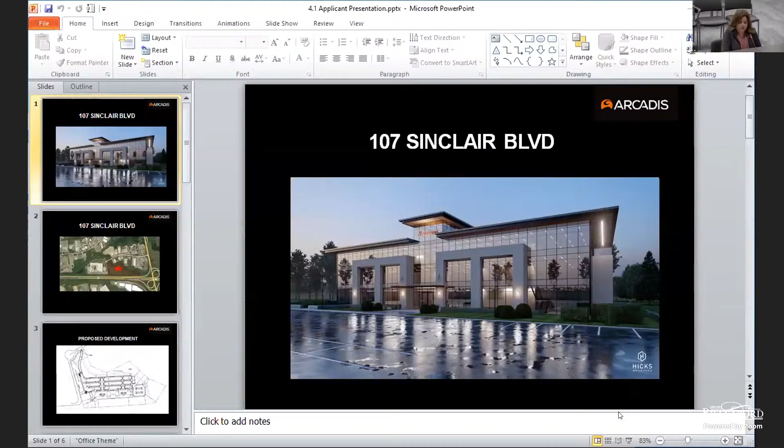Good morning. Good morning, that working? Great, good morning. My name is Odette Gomes of Arcadis Group. I'm representing the applicant this morning. So I am here in support of staff's report and their recommendation for approval.

Next slide, please. So the property currently includes 115 Sinclair and 107 Sinclair, so it's one property that has 2 municipal addresses. The subject of this application, though, is just for the piece on 107 Sinclair, which is the piece on the right-hand side there of the slide with the star on it. The piece at 115 Sinclair currently has an industrial bakery on it, and 107 Sinclair is currently vacant. The 107 Sinclair piece consists of approximately 5.72 hectares in size. The lands are located south of Sinclair Boulevard and north of Highway 403.

Next slide, please. So the proposed development includes the construction of 2 3-story office buildings, each having a gross floor area of approximately 5,580 square meters. 428 parking spaces are proposed, 16 of which are accessible spaces, and access is proposed from Sinclair Boulevard.

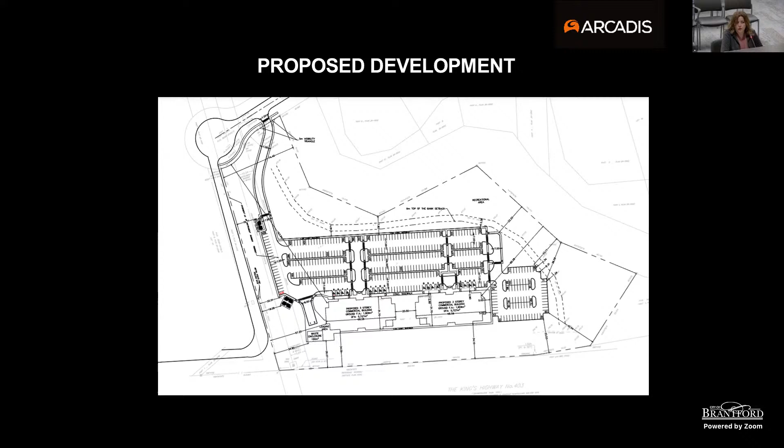So the applicant for this site is an existing established business, and they specialize in transportation, distribution, and logistics. They're seeking to expand and relocate a portion of their business to Brantford. They're looking to include a new head office here in Brantford, and this is the ideal site for them right now. This proposed development will help support their future needs. So all the required studies and reports have been prepared for this submission, and they all support the proposed development.

So in order to facilitate the proposed development, an official plan amendment is required to change a portion of the lands to prestige employment, permitting the 3-story buildings we're proposing, as well as maintaining some of the core natural areas. A zoning bylaw amendment is also required, and we're asking for a change in zoning from general industrial zone M2 to holding business park industrial exception 12 zone.

The proposed development is designed to avoid the western portion of the subject lands and the adjacent Fairchild Creek stream. To safeguard the preservation of natural features, a buffer area has been provided and confirmed by a slope stability study. These lands will remain protected. An environmental impact assessment was also conducted, confirming that the proposed development will not create negative impacts on the natural heritage features.

The redesignation of the subject lands to a prestige employment area will allow the City of Brantford to contribute to the provincial objective of municipalities designating and preserving lands within settlement areas located adjacent to or near major goods movement facilities and corridors, including major highway interchanges, as areas for manufacturing, warehouse, and logistics. The subject lands have been identified as part of an existing employment area, which contributes to the overall economic output of the municipality and province.

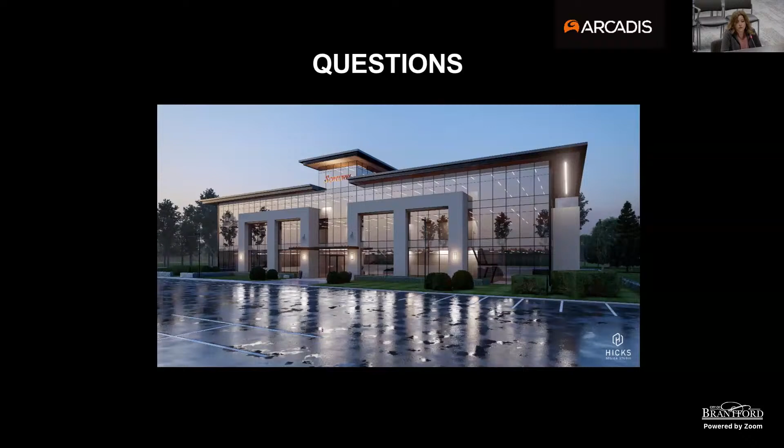As the City of Brantford grows in population, spaces that contribute to economic viability and long-term success are important. The proposed office buildings on these lands recognize this need and directly contribute to supporting job growth along with population growth. It is my opinion that the proposed development represents good planning, and we ask that you support our request this morning. I'm happy to answer any questions and provide clarification.

So members, anybody have any questions? We'll start with Councillor Sluss.

Thank you, Mr. Mayor, and welcome, Odette. The picture, the rendering that you're showing, is that of one building, or is that split in the center there? Is that one building or is that one of two? Through the chair, yes, it's one building, so both buildings will be identical. There'll be two buildings. So that's one of the two that you're showing a picture of?

That's correct. And is that all purpose built for that company, or is some of it going out for leasing? No, at this point it's all purpose built for that company. It may not even be enough to service their needs, so they are looking at potential other sites as well.

Okay, thank you. Councillor Carpenter. Thanks, Odette, and wonderful job on this development, by the way. I know we've been through it from the very beginning, and there was some concerns about the placement of the buildings, and you've adjusted that. The buildings are at the front, facing the highway, so it gives great exposure to the design.

In the rendering of the building, it showed a parking lot in front of it. That won't be the case here because the parking lot's behind it, right? Through the chair, yes, that's correct. And for my colleagues around the table, that development sits down below the other developments on Sinclair, so actually the sight lines for the developments on Sinclair will not be blocked by this development at all. That was one of the concerns of some of the development behind it. I showed them the drawings and the height and they were quite thrilled with it.

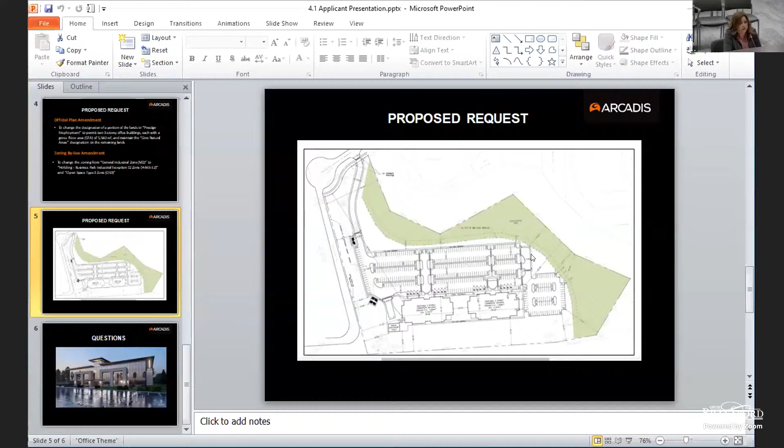That map is also in your report. The piece shown in green is the piece that is protected. Those are the lands that will remain in the natural core, and we've protected them. There's a buffer that's been provided, and it's been confirmed through a slope stability study we've done. We've also done an environmental impact assessment. So all of the lands shown in green are the lands that are going to be protected.

We're staying - yes, that's not my question. My question is, what is the area that has been removed that was previously protected? In the new official plan, the entirety of the lands were put into the plan as natural core areas until the environmental field work was done to determine that not all of the lands need to be protected.

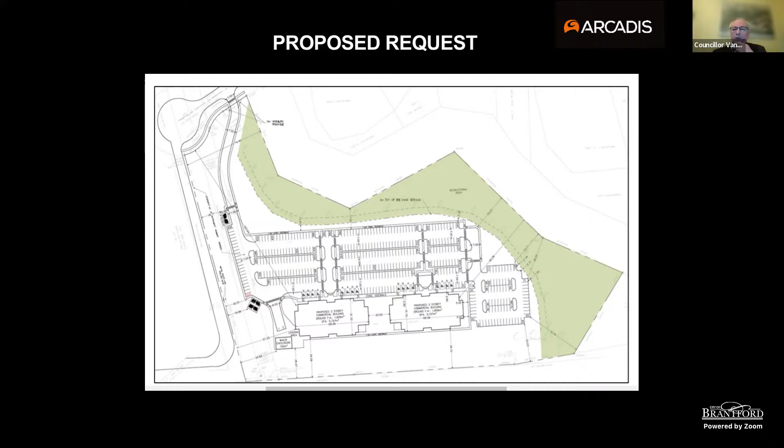Is it your opinion that the green area cordoned off is to be protected in the future? That's correct - the green piece in that diagram will remain protected and will remain designated and zoned for natural areas. I appreciate that, because I was making an assumption based on the transition of your driveway coming in, that perhaps that green zone went straight up to where the driveway entrance was, and my thought was to move the driveway - but if that's the case, very well done. Thank you for your question.

Appreciate it. Odette, I have a question - we are not often blessed with Planning Act applications for head offices, this is great to see. So question for you: is the fact that Brantford has an airport a factor in this owner deciding to set up a head office here?

It definitely is a factor, plays into it. There's a lot of great reasons to come to Brantford - Brantford has changed a whole lot, offers a whole lot more than it ever did before. So Brantford was always very high on their list, and they're very excited to have this opportunity to come to Brantford and grow here. Right, and the airport being one of those factors. Absolutely. You're a great salesperson for Brantford, Odette.

Councillor Carpenter, we've got time for one more question. The green space we're talking about here - when you're speaking to the owners, see if they're interested in allowing people in the community to plant trees on that green space. It's not full of trees now, but we're always looking for places to plant trees, and this would be an ideal spot to plant a mini forest. Through the chair, there is going to be a lot more tree planting in that area. There are trees that will be removed from the site, and we will be adding more trees. But I'm sure that's something they'll definitely welcome.

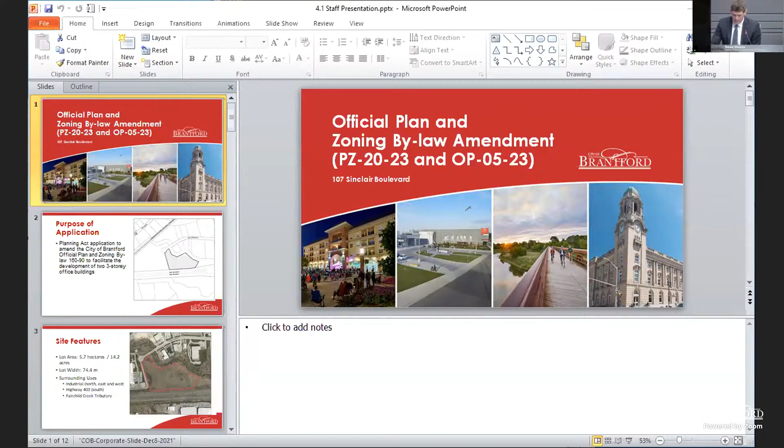Good morning, Mr. Chair, members of the committee. My name is Sean House, and I'm a senior planner here at the City of Brantford. I'm here because we've received an application to amend the official plan amendment and zoning bylaw at 107 Sinclair Boulevard, and as we've heard, this is to facilitate the development of two 3-story office buildings.

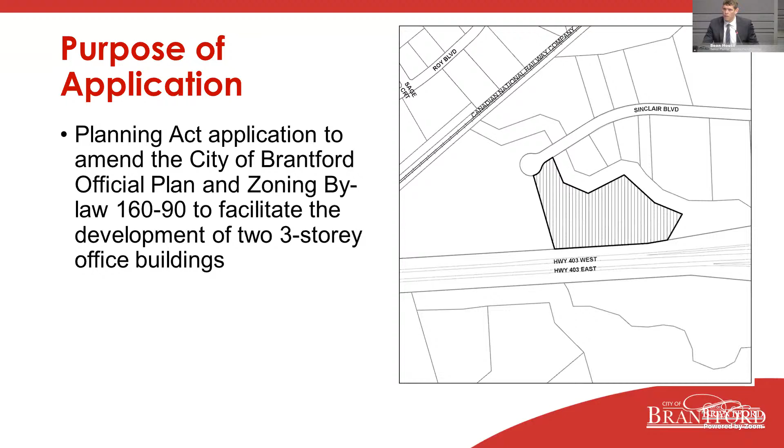The subject lands are located south of the Sinclair Boulevard cul-de-sac and north of Highway 403. They have a lot area of 14 acres and a lot width of 74 meters. The lands are currently vacant and the topography is generally flat, aside from sloping towards a tributary of Fairchild Creek, which runs along the northern and eastern borders of the property. The subject lands are surrounded by industrial uses in all directions, and Highway 403 to the south.

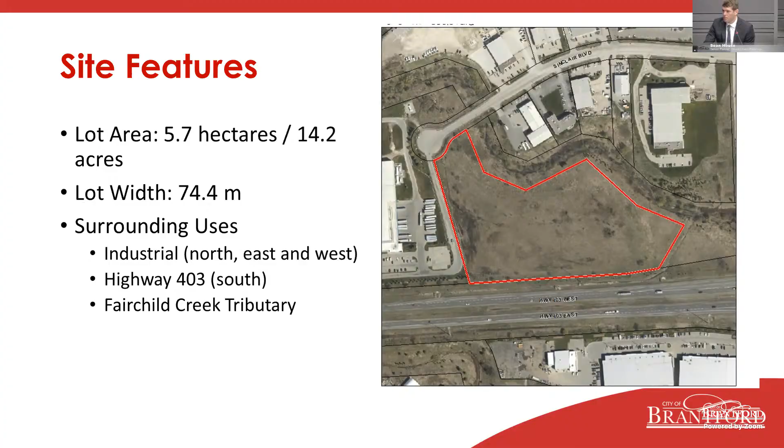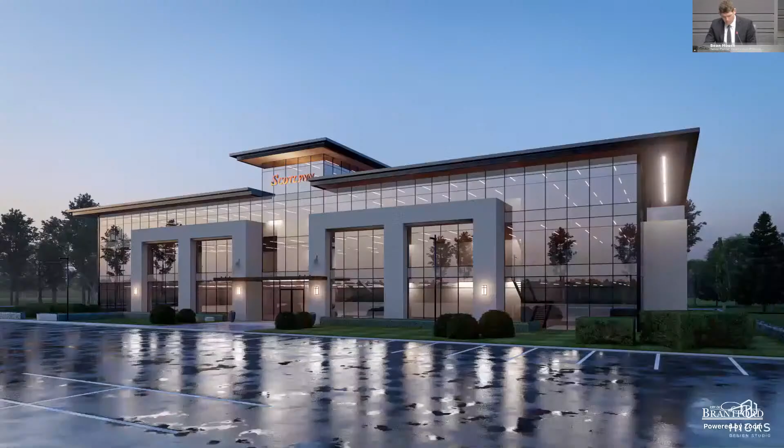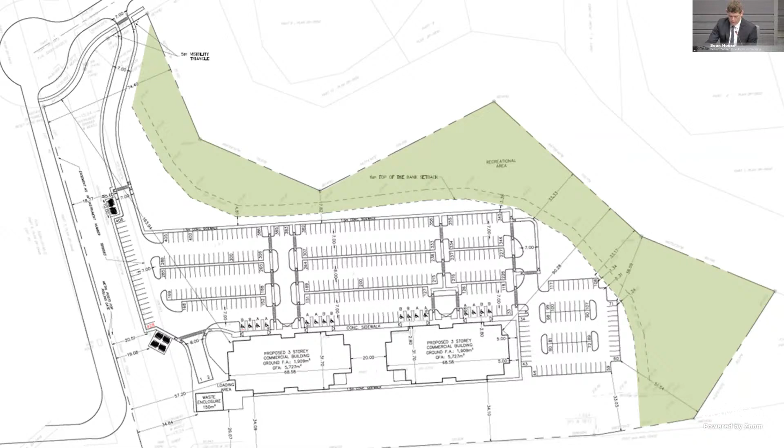Associated parking for 428 vehicles, as well as some bicycle parking spaces. The buildings are located centrally on the site, slightly south, and the area highlighted in green on this slide will remain green space.

Here's the rendering just to give you a sense of what's being proposed and the attention to building design that's being given.

The lands are currently designated core natural area in the official plan, and the applicant is proposing to amend this to prestige employment. Through staff's review, it was determined that a portion of the property that buffers the tributary will need to remain as core natural area, but the remainder can be redesignated as prestige employment. This designation does permit office uses up to a maximum of 4,000 square meters.

While this is slightly above that, staff consider the proposal appropriate given the proponent's logistics and transportation operations, which are permitted uses in the area. So this will all be implemented through a modified policy area in the official plan.

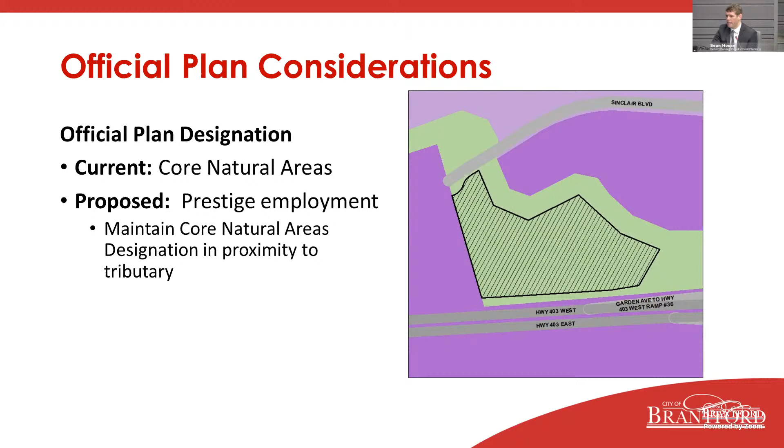The prestige employment designation does require a high standard of building design, which was shown on the previous slide, and the buildings will exhibit these characteristics. It's going to create a nice prominent gateway into the city of Brantford along the 403.

The lands are presently zoned general industrial zone, and the applicant is proposing the business park industrial zone, with a special exception to accommodate the proposed lot coverage, number of loading spaces, and minimum building height.

The holding provision will ensure that the appropriate studies have taken place before development occurs, and I'll speak about that in my next slide. The remaining area will be zoned as open space type 3, which will align with the remaining core natural areas designation.

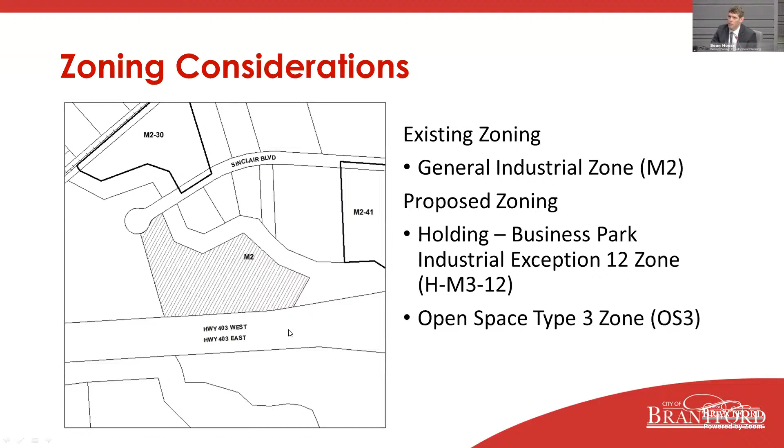In staff's review, it was determined that a few points of clarification will need to be made to the environmental impact study, and that a land use compatibility study, a slope stability study, and an archaeological assessment will need to be finalized. Therefore, they've been made a condition of holding, and development will not be able to take place until these studies are provided to the satisfaction of staff.

I'd like to conclude that this application is consistent with the provincial policy statement, the growth plan, and the city's official plan. The proposal promotes good economic development and is going to accommodate a significant number of jobs, which will assist in reaching the city's targets. Planning staff recommend that official plan amendment OP 0523 and zoning bylaw amendment PZ 2023 be approved. Thank you, and I'm happy to answer any questions.

Any questions for Sean? Councillor Sloss: Thank you, Mr. Mayor. You indicated, Sean, that this will help us achieve the employment target, or I forget the exact wording you used. Do you know how many people will be working here? Has that been part of your discussion?

Through you, Chair, the job target for the city is 80,000, so this will contribute to that. We've been provided with floor plans of what these office buildings will look like, and there are hundreds, if not over 1,000, desk spaces in those floor plans. Wow, okay, thank you.